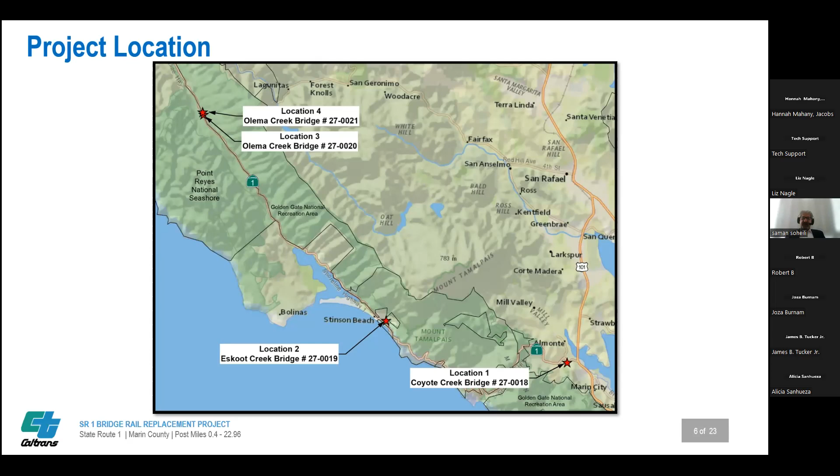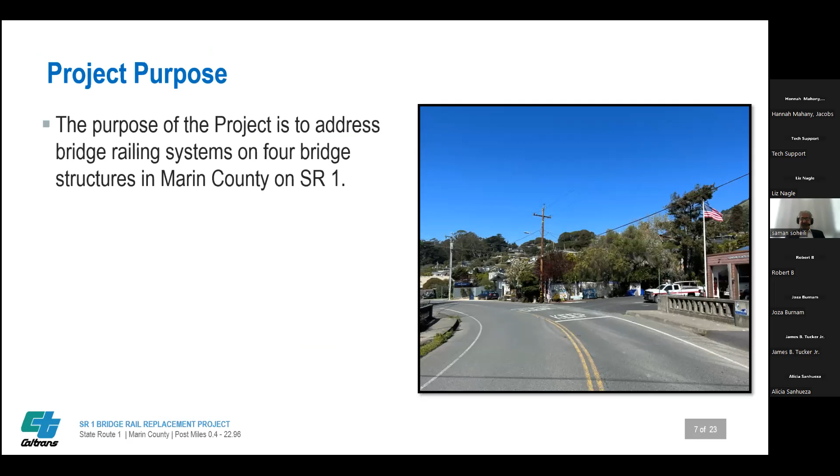The project is needed to meet current Caltrans bridge railing safety standards. Safety standards for highway design consider speed, transportation modes, surrounding land use, size of current vehicles using the road, and the required safe distances between motorized and non-motorized traffic.

I will now hand it over to James Tucker, the project engineer, to discuss the project components and construction activity.

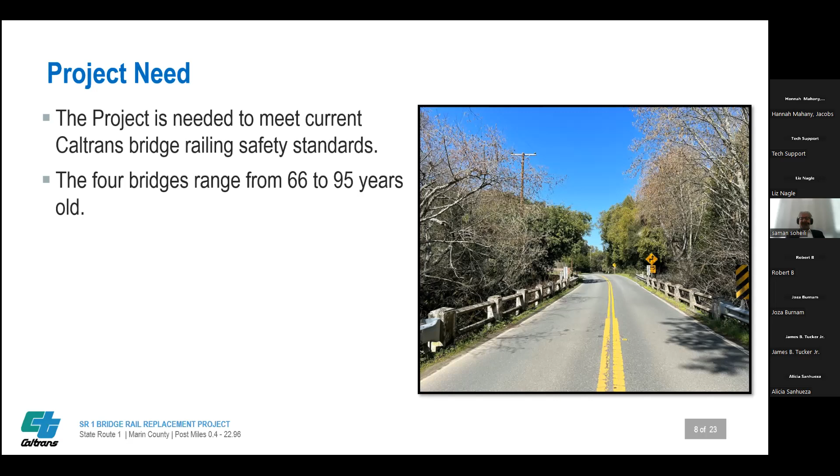Caltrans proposes to replace and upgrade the bridge railings at location 1, Coyote Creek; location 2, Eskoot Creek Bridge; location 3, Olema Creek Bridge South; and location 4, Olema Creek Bridge North, on State Route 1 in Marin County.

The project would also include widening the bridges to accommodate the new bridge railings. Location 1, Coyote Creek Bridge, would be widened by approximately 2 feet on each side. Location 2, Eskoot Creek Bridge, would be widened by approximately 2 feet 1 inch on each side, in addition to accommodating the reconstructed standard sidewalk width.

Location 3, Olema Creek Bridge South, would be widened by approximately 1 foot 5 inches on each side, and location 4, Olema Creek Bridge North, would be widened by approximately 8 inches on each side. Lane and shoulder widths would remain in place.

Location 1, Coyote Creek Bridge, is the only location where the abutments would be widened, and at location 1, Coyote Creek Bridge, and location 3, Olema Creek Bridge South, the wing walls would be modified.

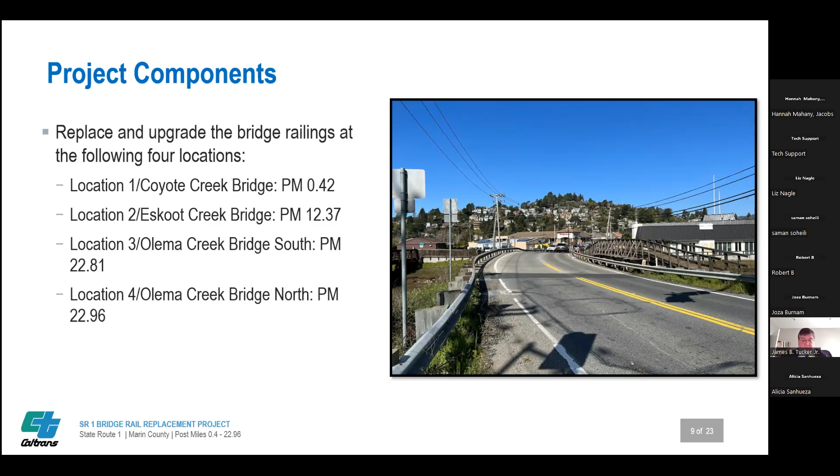The photo on this slide depicts the existing conditions of location 1, Coyote Creek Bridge. Additionally, the upgraded bridge rails would improve safety for bicyclists and pedestrians.

Prior to the beginning of construction-related activities, construction area signs, environmentally sensitive area (ESA) fencing, temporary debris catchment systems, and gravel bag berms would be installed. ESA fencing would be used to protect vegetation, trees, and other sensitive areas from construction-related activities.

The temporary debris catchment systems would be installed to contain and prevent demolition and construction debris from entering the creeks below the bridges. They include, but are not limited to, attachments on construction equipment, plastic bibs, plastic sheeting, liners, tarps, netting, drip pans, and absorbent materials.

The gravel bag berms would be used at location 1, Coyote Creek Bridge, and would be placed outside of the water, away from mean high or high tide, close to the abutments.

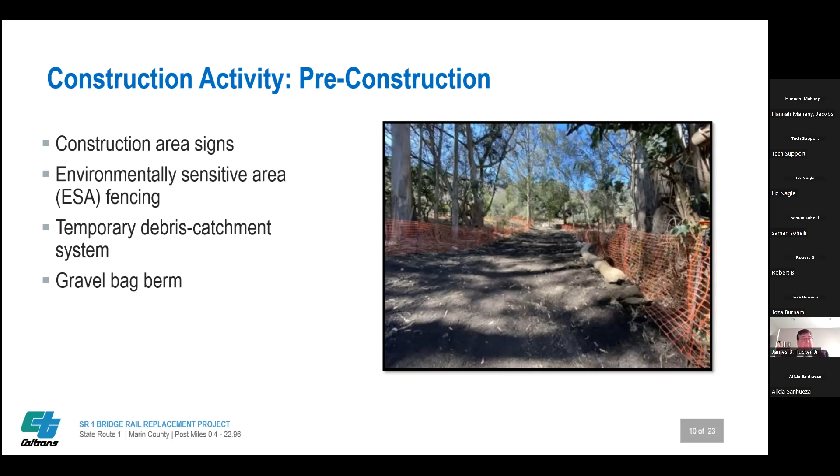A transportation management plan (TMP) would be required for the project. It is anticipated that the proposed construction would require one-way alternating traffic control. Work would be conducted one side at a time. Therefore, one lane would be closed and one-way alternating traffic control would be utilized.

The TMP would include public information and press releases to notify and inform motorists, local businesses, community groups, local entities, emergency service providers, and local officials of the upcoming closures and the work involved.

Additionally, optional detour routes would be offered to the traveling public at location 1, Coyote Creek Bridge, and location 2, Eskoot Creek Bridge.

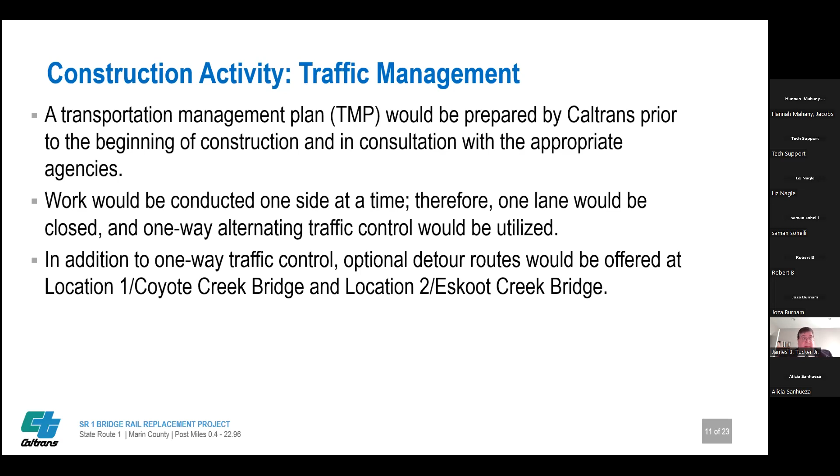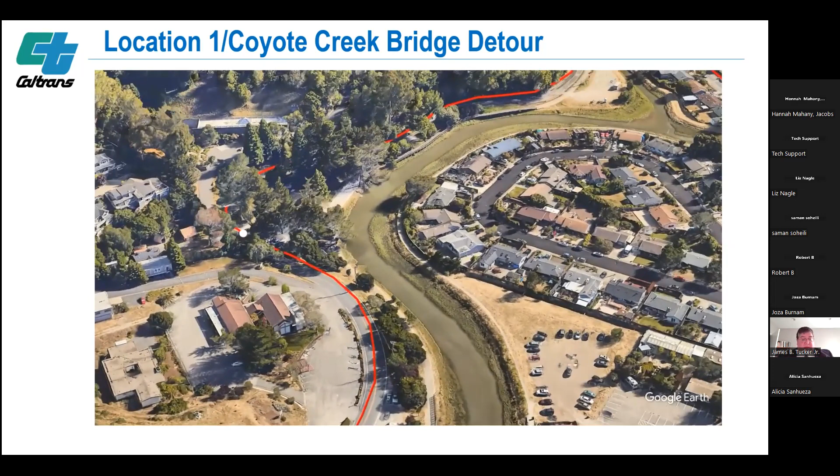The northbound detour would begin at the intersection of State Route 1, also known as Shoreline Highway, and Tennessee Valley Road. Turn left onto Tennessee Valley Road, as you can see the white dot marker following the red line, right onto Marin Avenue, right onto Flamingo Road, and at the end, at the intersection of Shoreline Highway and Flamingo Road, the traveling public would then turn left onto Shoreline Highway to continue traveling north.

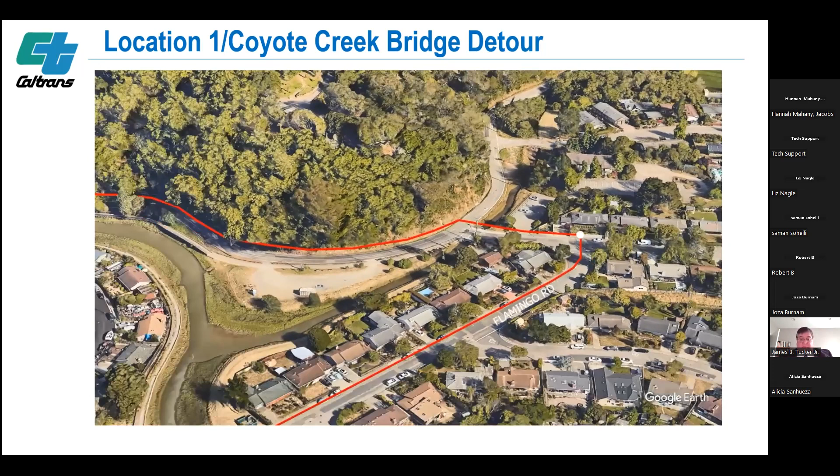The southbound detour would be the reverse. Signage to guide the traveling public through the detour would be made available.

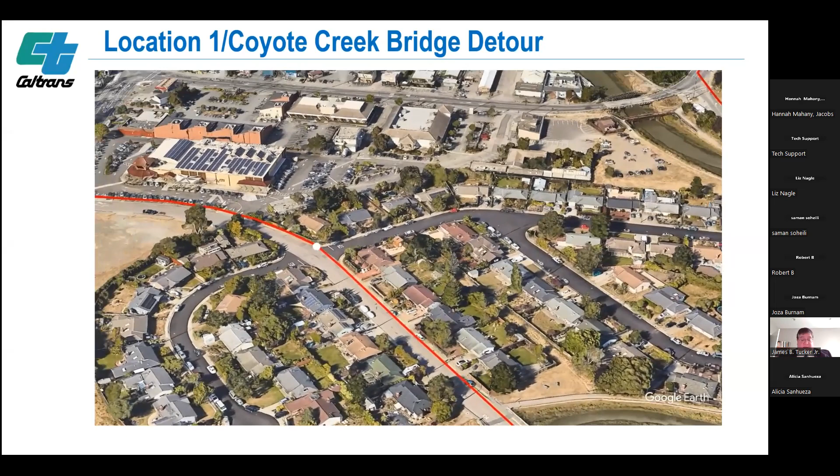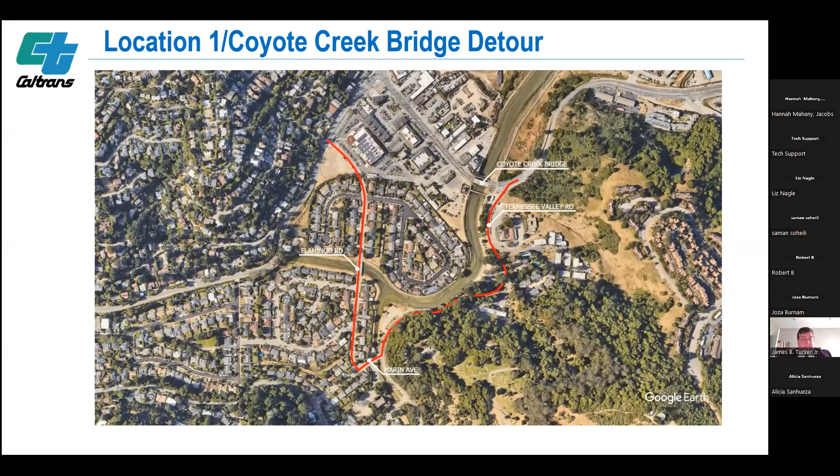This is a visual simulation video of the detour route at location 2, Eskoot Creek Bridge. The video points out Eskoot Creek Bridge adjacent to the Stinson Beach Fire Station, as well as Arenal Avenue, Calle Del Mar, and Shoreline Highway.

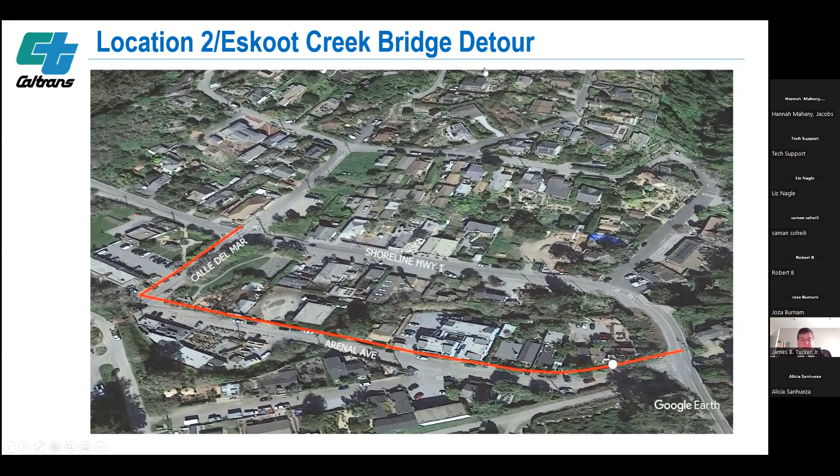The northbound detour would begin at the intersection of Shoreline Highway and Arenal Avenue. Turn left onto Arenal Avenue, right onto Calle Del Mar, and then end at the intersection of Calle Del Mar and Shoreline Highway. The traveling public would then turn left onto Shoreline Highway to continue traveling north.

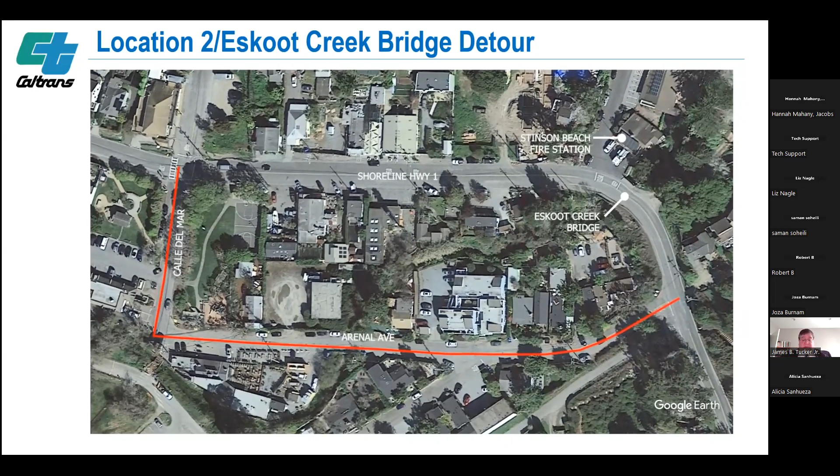The southbound detour would be the reverse.

The project is anticipated to be constructed in 3 stages. The northbound side would be completed in the first stage. The first stage would include closing the northbound lane, restriping for one-way alternating traffic control, installing temporary barrier systems along the center line of State Route 1, installing temporary crash cushions, and installing temporary traffic signals along the approach sections.

Then vegetation would be cleared where applicable. The bridge would be widened, the bridge rails would be upgraded, and vegetation control would be installed. The northbound lane then would be reopened.

This construction methodology then would be repeated for the second stage of construction to complete the southbound side of the bridges. The southbound lane then would be reopened. Location 3, Olema Creek Bridge South, and location 4, Olema Creek Bridge North, would be combined into one work zone.

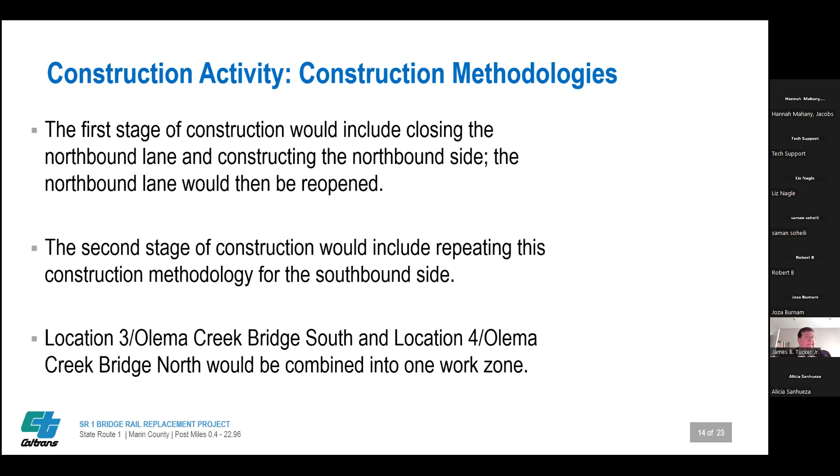As construction of the bridge rail replacements concludes, the third stage would include removal of all construction-related items. This includes removing the ESA fencing, the temporary debris catchment system, the gravel bag berm at Location 1 Coyote Creek Bridge, construction area signs, temporary barrier systems along the center line of State Route 1, temporary crash cushions, temporary traffic signals along the approach sections, and restriping.

For areas that require clearing and grubbing of vegetation, vegetation control and revegetation efforts would be finalized during the design phase. In addition, the project would conclude with a 5-year plant establishment period once construction is over. We will discuss the project features and avoidance and/or minimization measures that address revegetation efforts in the next slide.

This photo is a visual simulation of Location 4, Olema Creek Bridge North, proposed conditions showing minor to no changes in the surrounding vegetation.

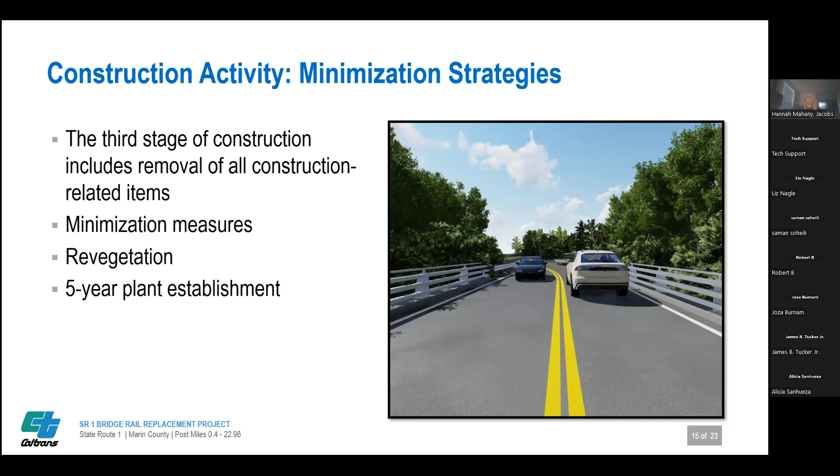Project features, PFs, are measures incorporated into Caltrans projects to reduce environmental impacts. They can include both design components of the project and standardized measures that are applied to most, if not all, Caltrans projects. Avoidance and/or minimization measures, AMMs, are additional measures to avoid and/or minimize a project's environmental impacts, but are more specifically tailored to a given project's particular impacts.